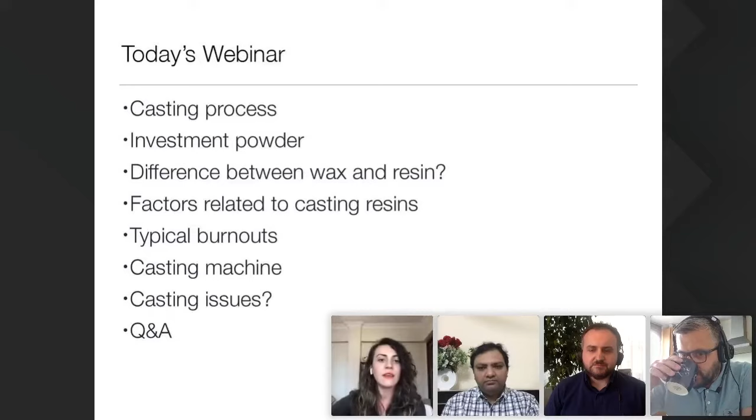Okay, perfect. Thank you very much for joining us, and thank you for everybody to listen to us. It's a very hot topic, I think, casting. I have been in the jewelry industry for the last couple of years, and I think that this is the most asked question topic where people have some issues about casting.

Particularly when you look at what happened in the last 10 years or so, there are a lot of resins, different types of resins, and 3D printing has evolved. So today's topic is about casting, but specifically casting for resin.

We will be speaking about the general casting process, the investment powders, what is the difference between wax and resin. So I'll go through the presentation, and then, Tulay, you will collect some questions, and Dipen and Dave, you can comment, and then at the end we will have a good chat together.

We will speak about typical burnouts, what type of casting machines, and the casting issues.

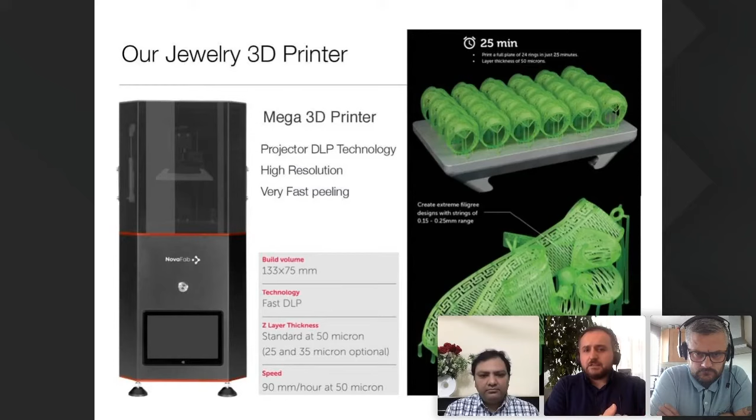We manufacture 3D printers. This is our latest DLP printer, which is very, very fast. And we also manufacture different sorts of castable resins that are suitable for a lot of different 3D printers.

In the previous webinar, we spoke about the different types of resins that we have, and whether you can use them for LCD printers, for DLP printers, for SLA printers. But we have pretty much a good range of castable resin, and our specialty is really castable resin. So this is the topic.

What is important about the resin is that you want to get basically the same casting like wax. You want to be able to print properly, and then in our case, we don't need any post-curing. And then you want to cast it in a simple way so that you will get the best result. So that's my introduction about our resin and the 3D printers.

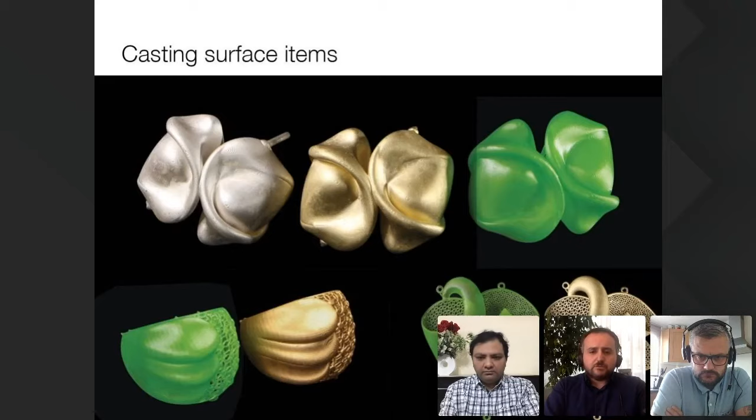In the previous slides, as I mentioned, we have some surface jewelry. You can also do stone settings and cast directly with stones. We have customers doing it in India, Turkey, and also in Dubai.

So the main topic is let's start to speak about the casting and how we work. One thing is the chemistry of the resin, which I am an expert in. Dipen and Dave, you are very well versed in the chemistry of investment. So I'll go through the slides, and then please comment, and we will speak together.

I just want to briefly mention that investment powder - some customers or people think you just mix it with water and that's it, like a powder, like plaster, and so on. But actually there is a very specific chemistry going on there. Here I just put a few slides showing that when you add water to this investment powder, the investment powder has a transformation happening.

Yeah, exactly what is written there. Basically, inside the investment powder - when you look at most used investment powders in the jewelry industry, it's made of silica, which has cristobalite and quartz in it, and it also has gypsum. Gypsum is the binder that is used to put it together. In the dental industry they use phosphate-based investments as a binder, but in the jewelry industry they use gypsum.

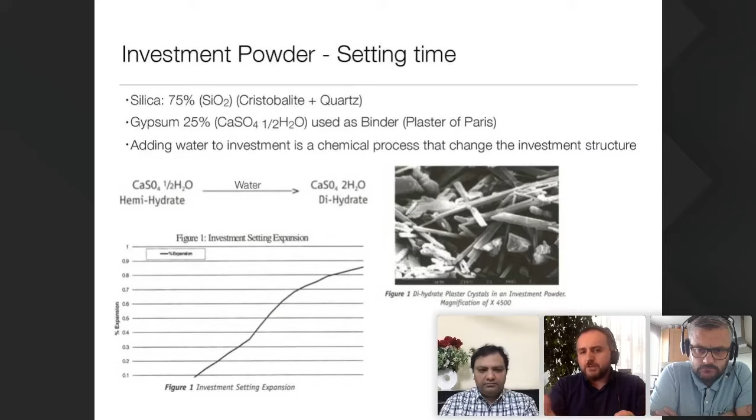That's very important, because when you add water to the powder, you need to think of it like a chemical process. And when you speak about a chemical process, you need to consider timing - how you mix it. If you mix it too much it may happen differently, if you mix it too little, if you put too much water or too little water. Here we have some instructions from one of your latest products, I think, Dave.

Excuse me, I have one question - how about distilled water? No, not distilled water, it's very different than deionized. Deionized, you're taking the ions out. Distilled, you're taking minerals out.

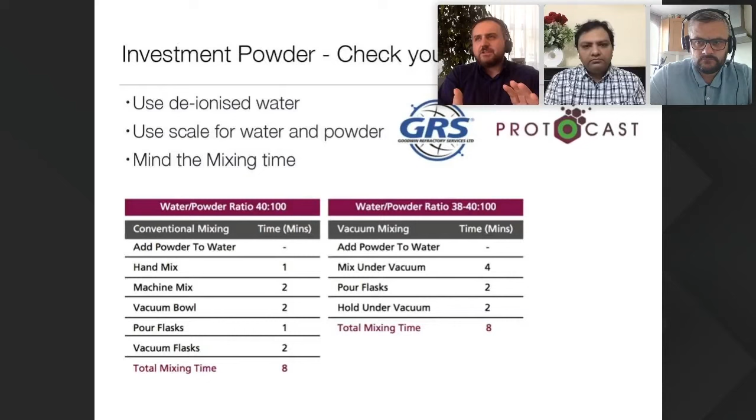It changes things - so we don't want any ions in the water, that's the first thing, you need to take out the ions. The other thing I want to say is when you do the mixing, let's say 40:100 or 38:100 or whatsoever, there's an important question of whether to use a scale or measure volumetrically. From my knowledge, scale is the right thing to do - scale is always number one. Always, if possible use a digital scale, it's more precise. In one factory I visited maybe 2 years ago, I think what happened is they were using a scale, but the scale wasn't calibrated - in other words, if you put 1 kilogram, it didn't weigh 1 kilogram.

Because in large factories when you use the same equipment nonstop, sometimes you need to zero your scales and make sure that you don't have this important difference. Even if they are using digital scales, have them calibrated.

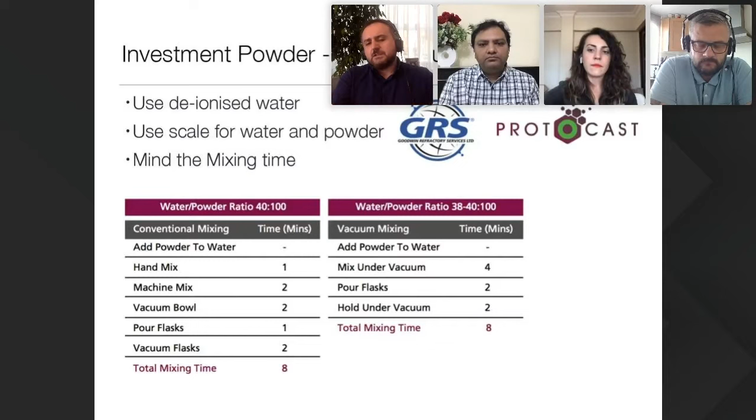What is very important, I think, is to mind the mixing time. Whether you mix with a vacuum mixer or conventional mixing, these minutes are not just there to give an idea. Because if you mix, let's say 2-3 minutes more or less, the chemistry will be different, so the whole process will be changed.

Last questions about mixing powders. Should I change the water powder ratios according to the humidity and the weather? No.

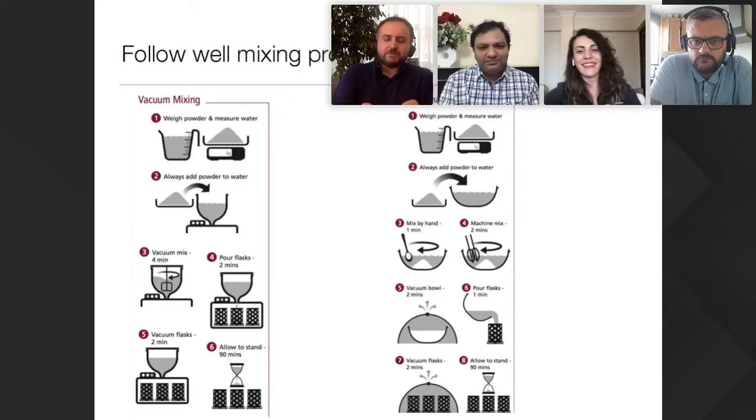We will maybe answer it later on, because there is actually the humidity — to remove the humidity we have a process as well. So whether you are in a very humid country or less humid environment, you may use that process to make sure the humidity is addressed.

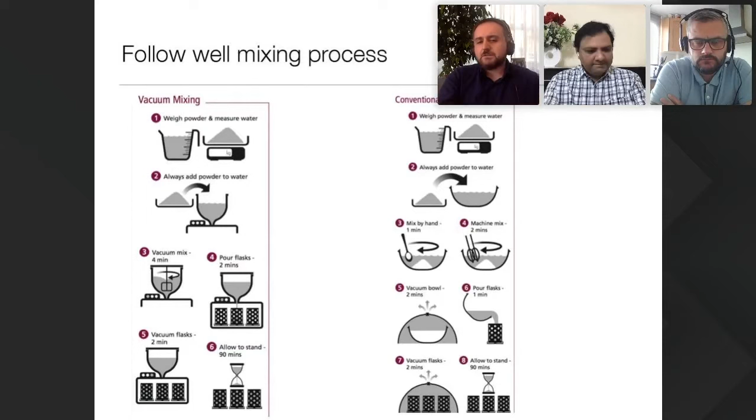Here is the process, but you can find it online on your company website, and there are all the instructions for every powder, the mixing times, the way it should be mixed, and I think it's pretty straightforward.

Okay, explained everything now. One thing we discussed earlier is we mix and settle down the flask, and during that settling, basically mixing and settling, the gypsum is expanding. But then what happens when you heat it? You wait, let's say 2-3 hours on the ground, and then you put the flask in the oven. There are actually different expansion and shrinkage areas.

That is, I think, very important and very interesting. First of all, the first phase between, let's say, 45-50 degrees up to 250 degrees — these are all in Celsius, so if there are some US attendees, they can convert it to Fahrenheit. But basically, you have this first stage where the gypsum is expanding.

After, you have a high expansion side, let's say from 250 up to 300 degrees, where the cristobalite element as well is expanding. So you have the gypsum that was expanding, but now there is a very huge force of expansion due to the cristobalite component inside the gypsum, which after a while the gypsum is now shrinking — it's a reverse effect.

And because the cristobalite expansion has ended, the expansion is going down. Then at around 450, 460 degrees, the quartz element starts expanding. I highlighted here a yellow area, which is basically the area which is not expanding — around 370 to 450 Celsius. That is a safe zone, because you know that at that area, your flask or investment will not be expanding or shrinking.

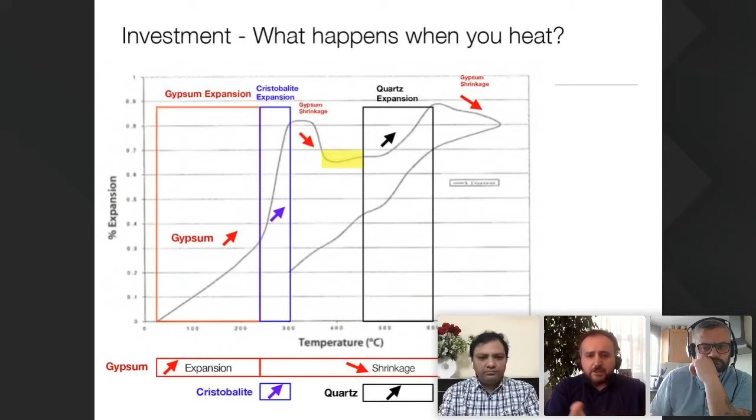Any comments on that, Dave or Dipen? No, you've explained it perfectly. That is exactly what's happening inside the flask — that's how it gets its fired strength.

So when we put it in the oven, what we should think is, depending on what happens to the heat and the forces, that this investment in the flask is expanding and shrinking non-stop.

You have these movements basically happening. The way that the investment powder gains its strength is when it expands more than the metal flask that it's in. That's where it gets compression and the strength. So it expands more than the flask, and then when it cools down, it stays expanded higher than what the metal flask is. Typically, this range is less than 1% in most investment, but I think it changes depending on the quartz, cristobalite and gypsum ratios, right? Because not all investment has the same amounts in it.

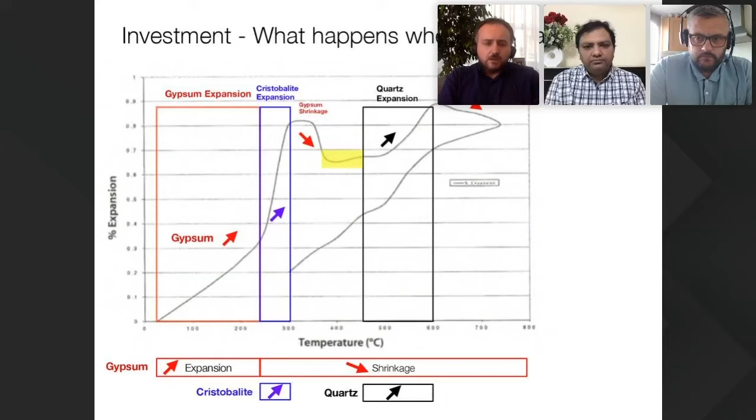Now we continue. I want to get into what is happening when you do resin casting, because for wax casting, when you go to 80 degrees or so, things start melting. Then you have the carbon that is burning after a while. And in some cases there is the dewaxing process that was traditionally made for the wax type of casting. But when you speak about resin, this is a totally different game. There's a very interesting paper, and I will give all those references at the end, or you can ask us and we can send you those papers, which is online.

What they did is they compared what happens between some resins - these are not our own resins, but some other resins - and wax. So here on the left-hand side, you have milled wax. On the top, the red one is the injection wax. All the others are resin. And on the bottom, you can see one known resin, they also call it wax but it's not wax, the ProJet from 3D Systems.

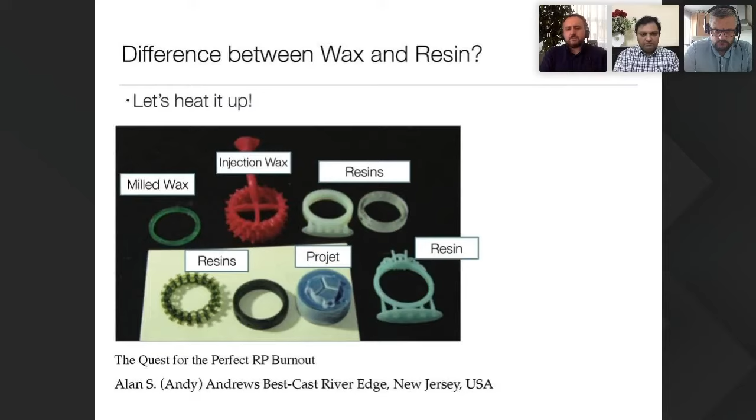So they took all those samples and fired them up, basically heated them up. Now, what happens is when you are at 100 degrees, on the top side you can see that already the injection wax has melted, okay? It didn't disappear, it didn't fly off, but it has melted. But the whole resin parts are still there. The milled wax seems to be stronger as well, so it's still there. On the bottom, when you go to 177 degrees, let's say 350 Fahrenheit, there is no more wax that is not melted. So the milled wax and injection wax are all melted, but you can still see whole pieces of resin that remain there.

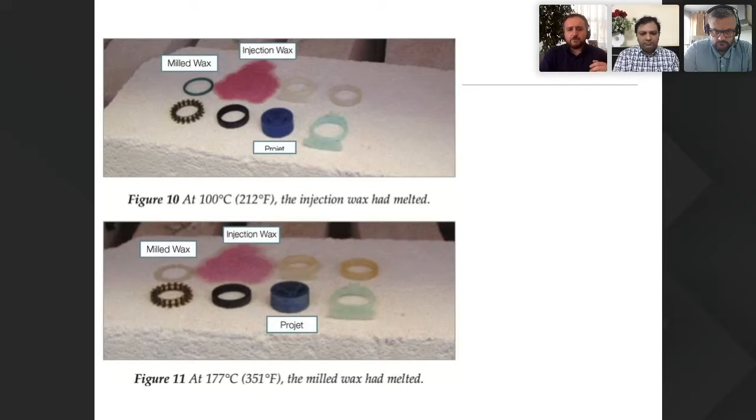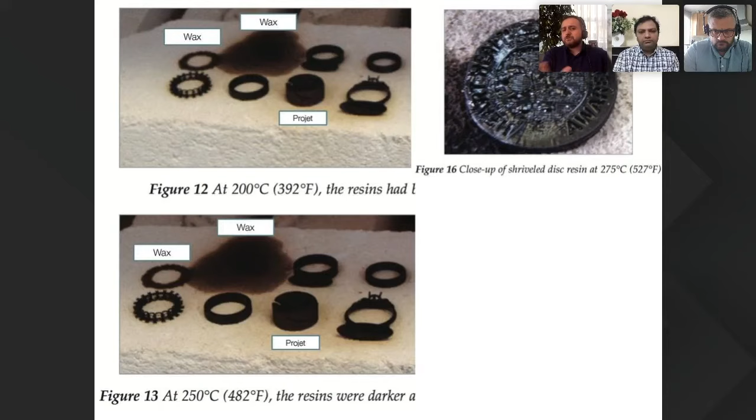Let's increase the heat a bit more. At 200 degrees, we don't see anything about wax. There is still a black spot there, but the resins and the ProJet part - what you can see is they become dark, and it's a sort of carbonification. So you can see that something has happened at 200 to 250 degrees. And if you look at some pieces at 275 degrees in those resins, you already see that there are some deformations that happen in the resin. This can be due to expansion or change in the shape of the resin.

Now let's continue. We are now at 375 degrees. As you can see, no sign of wax, but still these resins are there. And we push up to 700 degrees, which is quite high temperature, and you can see that those resins have ash remaining - some of them may have more ash, some of them may have less ash, okay?

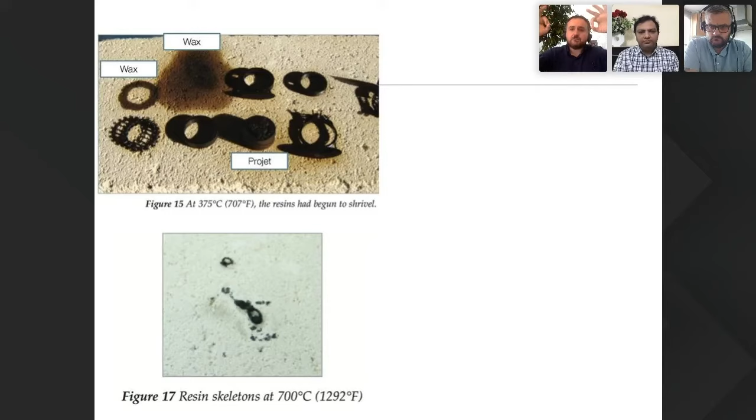So what happened here is that when you compare casting between wax and resin, never think of the temperature and say, well, wax is melting at around 80 degrees, it's already melted. So if you have the tree of your investment, this is already melted. If you have your rings on your tree, these are already melted, then they are at the bottom, waiting, let's say. And when you increase to 200-300 degrees and even more, the wax is going to fly off, okay? But for the resin, if you have a tree with the middle which is wax, the middle is melting, but your rings are still in the cylinder - they are still not melted, they are still staying there. So I think that's very interesting to think about.

And when we look at the most common issues with most resins on the market, what we can see is, first of all, you have a high content of ash. So even if you burn it at 700 or 800 or 900 degrees, you still have this ash component that stays in the resin. That's not the only problem, by the way. The other issue that most resins have is that during the burnout, when the temperature is going high, the resin is reacting with the investment wall.

So you have some reaction happening, and also the resin is expanding, so you have some movements happening. And this is a very important point to consider. When you cast a resin, you need to know how much it expands, what type of reactions it has with the investment, the content of ash, and so on.

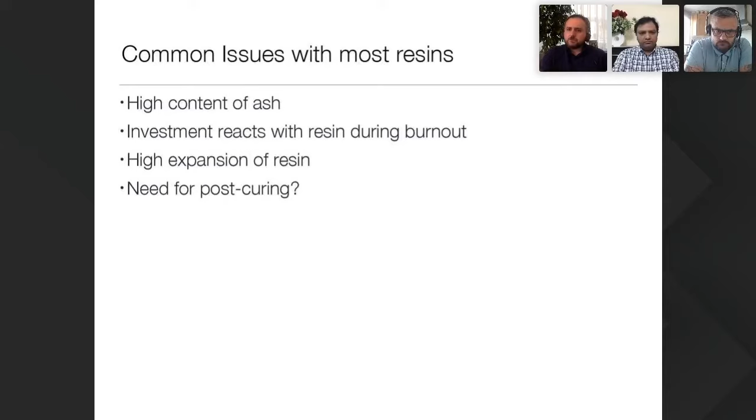Just a note about the resin, I've seen in a lot of forums and users, they do post-curing of the resin to improve the casting. This is not something you have to do with PowerCast resin, with our resin. We don't do any post-curing. But I want to introduce another paper that shows the result of post-curing. Any comments on that, Dave or Dipen? You're fine? Yes, it's okay, perfectly okay.

I don't want to, because we have a lot of slides and quite heavy content, so let's go fast here. What happens if you post-cure some resins? This is another paper which is very interesting, and we can share it as well. They took a very known resin in the market and did casting tests by post-curing 30 minutes, 1 hour, 2 hours, and they also did some heat curing. So they don't just post-cure, but they also leave it in the heat before making the tree. There are different tests, they heat cure and so on.

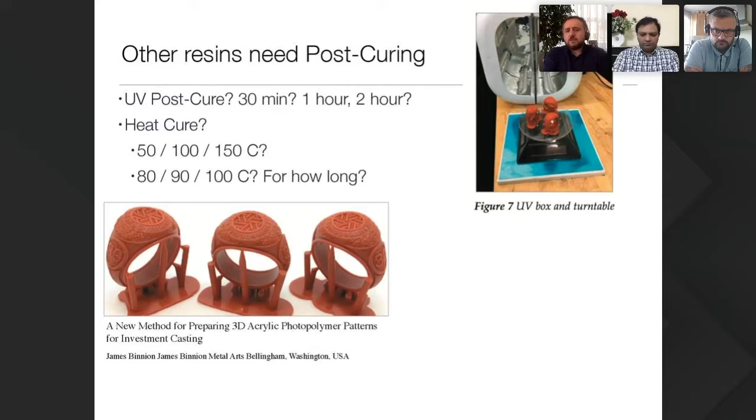I repeat, you don't need to do this for our resin. This is just a paper for other resins that has been made, and let's see what the results are. For that particular resin, if they UV cured, you have the casting result on top. And if you have the heat cure, you have the casting on the bottom. There is a slight improvement, but according to me, or everybody I guess, this is not really satisfactory.

What I'm trying to say is that if you post-cure or heat cure one resin, you may have improvements that change the chemistry of that printed part, which may affect the reaction between the resin part and the investment in the burnout. But this may not be satisfactory, and the result may not be good enough, because your starting point is not really a good castable resin, or not the right appropriate castable resin.

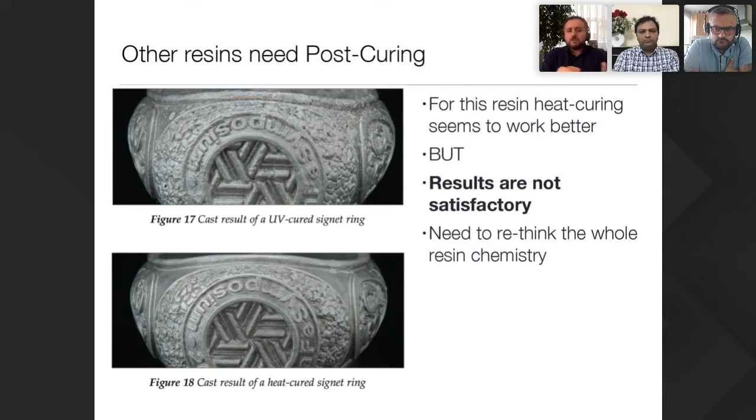I think one of the things we did 4 years ago in our R&D department is rethink the whole resin chemistry. We changed the whole thinking of how we should make a resin for 3D printers, considering the whole process of the burnout and the investment used. When you start looking at the chemistry, you have to change the basics. That's why you don't need post-curing in our case.

So let's see what happens if you use one of our castable resins. You have almost no content of ash. In some of them you have a little bit, but not so much. And that little bit, let's say 0.5, 0.3%, or very little amount, is already removed during the burnout, because there is a sublimation process, meaning the pressure, when it goes from solid to gas, removes that ash from the investment. You don't have any reaction with the investment.

You have a very low expansion, and one important thing when you print is you don't need any post-curing. Our resins are able to disintegrate quite early in time, and after 500 Celsius there is nothing that remains. I have some customers who try to go up to 800 Celsius or more, thinking that if they go to 800, 820 Celsius during the process, they will remove the whole resin. But actually you don't need that, at least with our resin, because after 500 degrees, everything is finished for the resin side.

Right? Dipen, you have a lot of customers in Dubai using our resin. Yes, it's a blessing for us, believe me, when they are using your resin. We have a lot of issues solved at the preliminary levels.

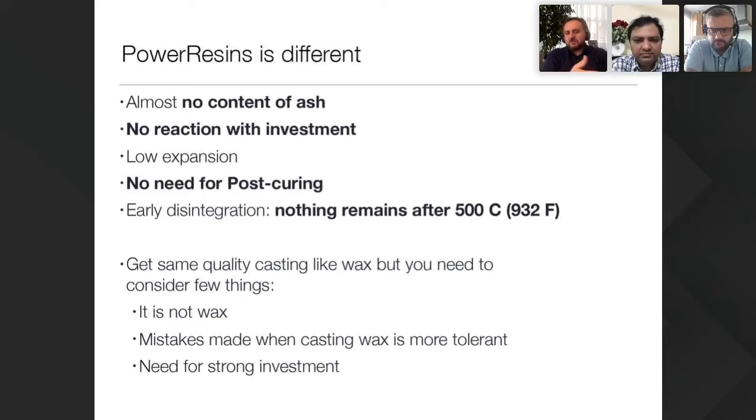It's not advisable, because you're firing cold air into a hot flask - you can get the mold to crack. I think they do this to try to remove the ash remaining from those resin parts. The problem is, if you burn out a resin part at 800 degrees, the ash reacts with the investment during burnout and stays on the wall of the investment. So the air you put inside won't remove that ash so easily. I don't think it's advisable. It's better to start with a low ash content or no ash content resin at the beginning.

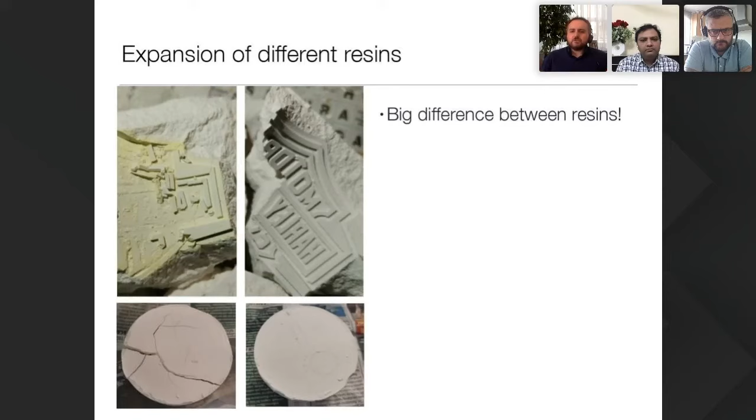By the way, here's a slide I have which is interesting. We took another resin and one of our castable resins, printed a big part, and put it in the investment. We did our burnout cycle, and due to the expansion phenomenon in the investment with that other resin, you can see the whole part on the left - all the details - the investment has cracked and broken. On the right side, you have a clean burnout. That's the difference between a good resin and another resin. There are a lot of resins on the market that say they're castable, but according to what? I really don't know when you look at the details.

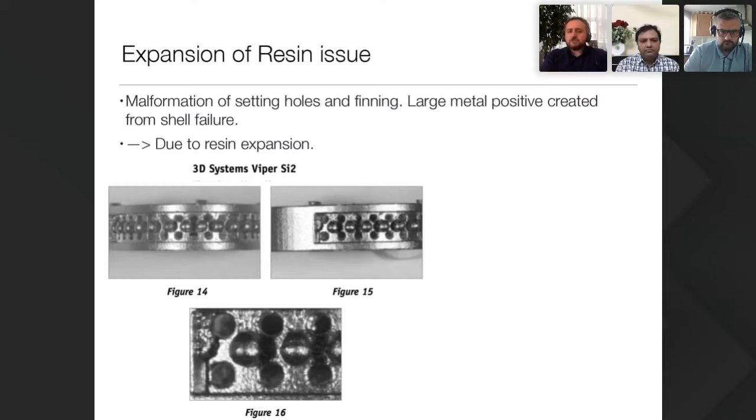Okay, now we're going to the hot topics, I think. Any comments until now? No, it's okay, it's good.

I receive, maybe every week, different questions from customers about what burnout to use. We've put official guidance on our website, PowerResins.com, and our team gives a lot of advice to customers. First, people think everything is about burnout. Burnout is important for the investment, definitely very important. It's also important if you know what's happening in your resin, so you can adjust your burnout accordingly. It's also important for the strength of your investment, which matters for your casting. So I want to speak a bit about the logic of choosing a burnout - what to look for.

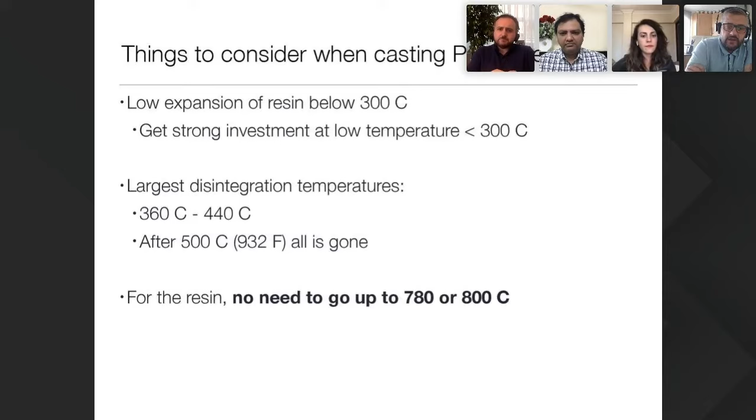Dave, you want to say something about it? You recommend, I think, 90 to 120 minutes or more? We recommend a minimum of 90 minutes. After investing, it's left undisturbed for 90 minutes.

You're on the same ground, I guess. Yes, I think there is no shortcut on that. People try to make it short, invest and then put it immediately into the burnout furnace. It's a very big mistake that they do. I think there are a couple of papers where 2 hours is a good time, but 3 is slightly even better. But 90 minutes is definitely the minimum. If you don't leave it 1.5 hours, you can have really serious issues with the strength.

Yeah, for sure. The investment powder isn't gaining its green strength in time. It isn't expanding. There's no compression. 90 minutes minimum.

Now, I have these slides for our customers when they cast power resins, about what they need to think about. There is a low expansion of the resin. We want an investment that is strong, but on the resin side, we want it to be strong below, let's say, 300 degrees. It doesn't really matter if it's strong at 700 degrees because there is no more resin in it anymore. So you want it strong when the resin is burning out.

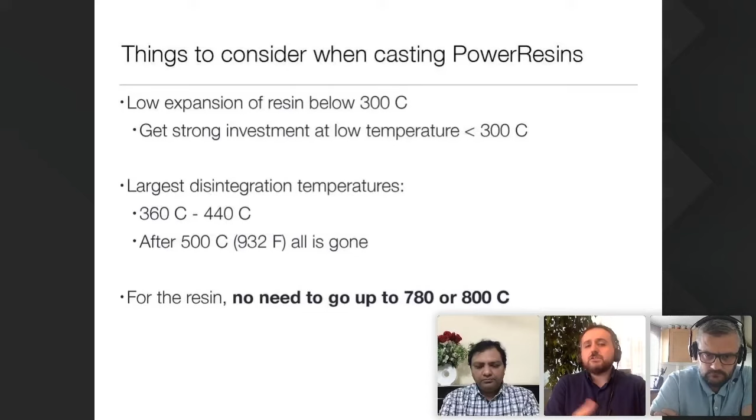We know that the largest disintegration period is around 360 to 440 degrees, but it already starts before that. So what's important is to have strength at the low temperature, and after 500 all is gone. So we don't need to heat the oven up to 780 or 800 degrees.

No, in our case. But for the investment powder, you have to go to 730 to get the expansion and get the full strength. Yeah, 730 is good, pretty standard as well. You're right, Dave. In those slides, I put 750 to make it simple. But is there any issue about the difference between 750 and 730? When it's that high a temperature, 20 degrees is not a big issue.

Okay, so we want to have a strong investment. How do we do that? First, you mix your investment and leave it at least, in my opinion, 2 hours, but minimum 90 minutes, ideally between 2 to 3 hours on the ground. You don't put it in the oven because it needs to lose its humidity to form and have all the expansion happening.

You wait 3 hours. There is a very interesting paper where they tested different burnouts, and one of them had a step at 100 degrees. At 100 degrees Celsius, the water is not boiling yet inside the investment. If you put it in an oven at 100 degrees, because the middle is much less in terms of temperature, it will not boil, but it will remove the humidity. In that paper, they put the investment in at 100 degrees for 2 hours, 3 hours, making a step like that.

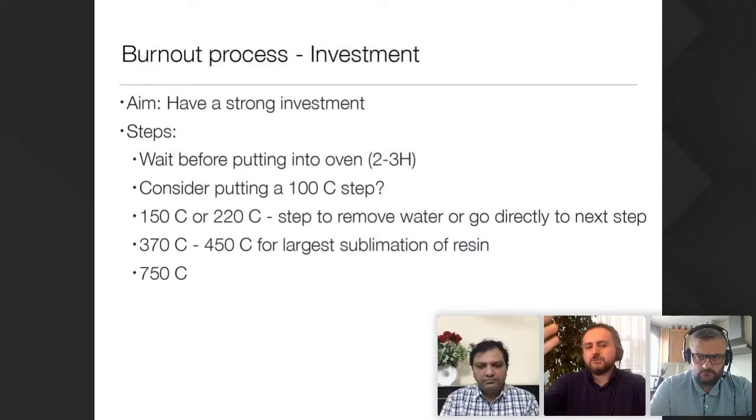Yes, exactly. When it condenses, you're creating steam, which creates pressure. Then remember there's this safe zone between 370 and 450 degrees, where the investment is not expanding. That's also good because this is where most of the resin is disappearing. So you can use that safe zone as a step and leave the investment there, then go to 730 or 750 and finish your casting.

So even if you go to 500 degrees or 270 degrees or whatever temperature you program your oven, inside your flask you have water. That water boils at 100 degrees. While it's boiling, until the whole water has been removed, the temperature inside the flask cannot go above, let's say, 120 degrees - it's very difficult. So there's this lag between what you think will happen to your burnout and what really happens, because of the boiling of the water you stay at around 100 degrees Celsius. Once the water is gone, then you increase.

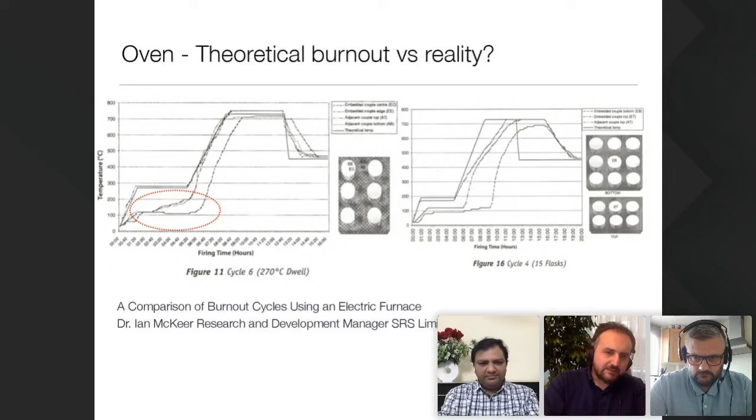So this is just a note about what is really happening versus what you think is happening, let's say. So here I put just a recommended burnout, but again, please take all those burnouts according to your investment powder.

So the first thing I always say is, at least with our resin, because we know it's very easy to cast, first follow properly the whole steps of the investment recommendation. This is the first step I recommend. Check the mixing time, the temperature, the burnout that the manufacturer of the investment is providing you. This is the first step, and at least it gives you a reference. So if you want to try different burnouts, at least you have the reference, the benchmark, saying this is what happens versus what the manufacturer is telling you. And trust me, if you follow what the manufacturer tells you and have proper investment, 90 to 99% of the cases you will have very good casting, at least with our resin.

Dipen, maybe you have a word on your experience in the Dubai area and in India. Yeah, sure. I think manufacturers put a lot of effort to define those processes, the temperature and other things. It's not just that they put numbers - they have done a lot of practice, a lot of tests, and then they put this number. So please follow the numbers they are suggesting, that gives the best results.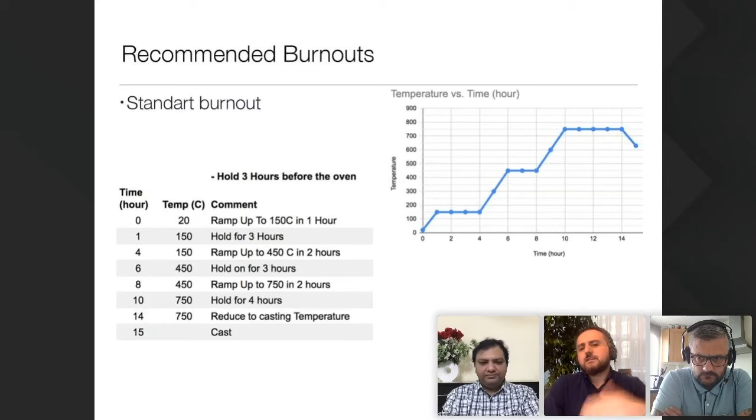We can speak about casting temperature, but casting temperature also depends on the type of the model, on your metal, on a lot of things. We will see some issues in a few slides where we can speak about casting temperature as well. And you want to do that last stage for at least 1 hour so that the inside of your flask gets to that temperature.

I have here another recommendation - I think some of your customers may use this as well. We leave it 3 hours outside, we put it in the oven, but we don't go to 150 degrees or 200 degrees. We leave it at 100 degrees for 3 hours. We do that because we want to remove the whole humidity.

We know that if we do that, the strength of the investment will be stronger than if I don't do it. Do you have a lot of customers doing that? Because this is not very common. Even the people doing overnight burnout, putting the flask in the oven, want to make sure they use the whole time - they keep it at a certain temperature, like 80 to 100 degrees for 3 hours, then slowly move up to make sure the moisture is completely dried, nothing remains. So a lot of people are doing this. The people doing day casting are always in a hurry, so it's a different scenario.

Yeah, that's correct. Then you can go to a step where you hold at, say, 150, in this case it could be 200 or whatever, because you already have an investment with very little humidity, so it will be easier to ramp up and the remaining water will be removed. Then you have your 370 to 450 zone, which is fine. And then you go to 750 or 730 - by the way, I've seen a comment that when you use stones or diamonds, the last stage, the highest temperature, may be slightly lower, right? I don't know if you have...

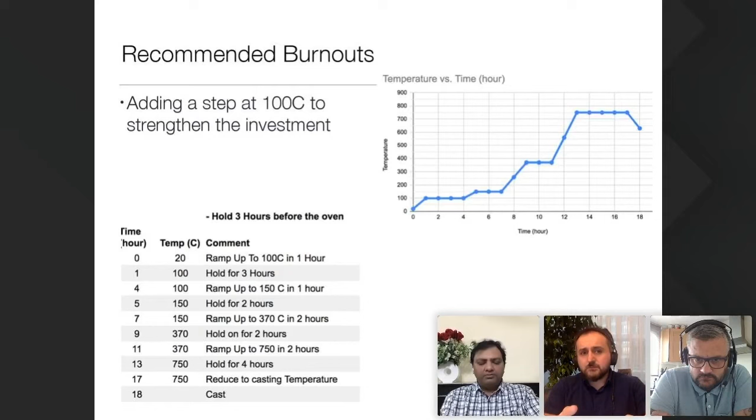Okay, very good, let's continue. So now, just to compare, this was our slide. We have a lot of steps here, and it's quite a long burnout - here we see like 17, 18 hours of burnout.

What happens if you remove the step of 150 degrees? Remember what we showed before, where even though I go very high, to 450, inside the flask it still remains at 120, 100 degrees because the water is evaporating, and then it will go up. So it can be done - I would say it is a possibility, but it's experimental.

What is your comment on that, Dave? It's experimental because removing that step between 150 and 220 is a critical step for the investment powder. Yeah, but that's not to say it doesn't work - we've seen it working in other places. I've been with Dipen where we've seen it working in places. It may depend - this cannot maybe be a recommendation for all investments, but in some cases I think I've seen it working as well, and even different. We'll see in the next slide. Directly ramping up works as well, in some cases.

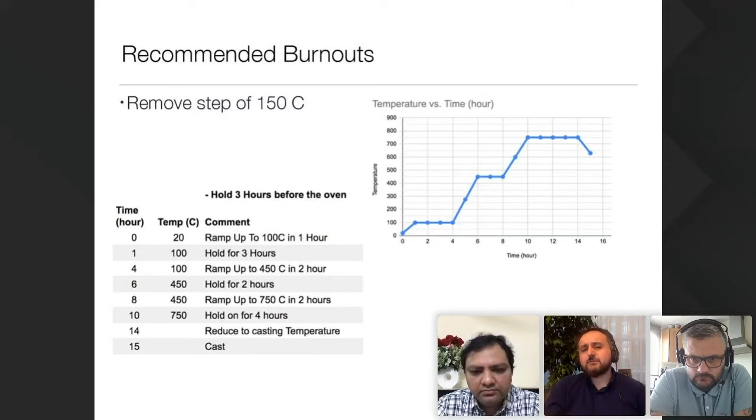From the resin perspective, there's no issue doing that. You can do it because the temperature, from 100 to 450 degrees, at least for our resin, has low expansion, so there's no major issue. For other resins, you may have issues doing that, I think. But as long as you stay - once you arrive at 500 degrees, everything is gone. So whether you do it fast or do a lot of steps, the 150 degree step doesn't change anything for the resin. That's what I meant. But the 100 degree step is interesting to make the investment stronger - that's important for the resin.

So, okay, you can even make it shorter, or directly heat up your oven to 750 or 800 degrees and just put your flask in. I have seen this done, I have seen that type of burnout. Again, these are experimental, and sometimes it works very well, sometimes you have other issues.

Hi, Tülay, some questions? Hi again. Yeah, we are almost coming to the shorter cycle - I got some questions about short cycles, but we are getting there.

Before that, how long should I leave the flask at casting temperature before I cast, because some say the inside of the flask is hotter than the outside? Minimum 1 hour - no, in the furnaces you have to keep it for 1 hour.

Immediately when you take it out from the furnace, you can go directly for the casting because you're sure that the flask is at the right temperature when the burnout is showing good or the precise temperature. One thing about the investment powder is it also holds heat very well on the inside. So one of the tests we do when we create a new recipe is we take a flask out of the furnace with a filigree item in it, and leave it for different times, 5, 10, 15 minutes before it goes into the casting machine. There's not a great deal of difference in the casting because the investment powder holds heat very well.

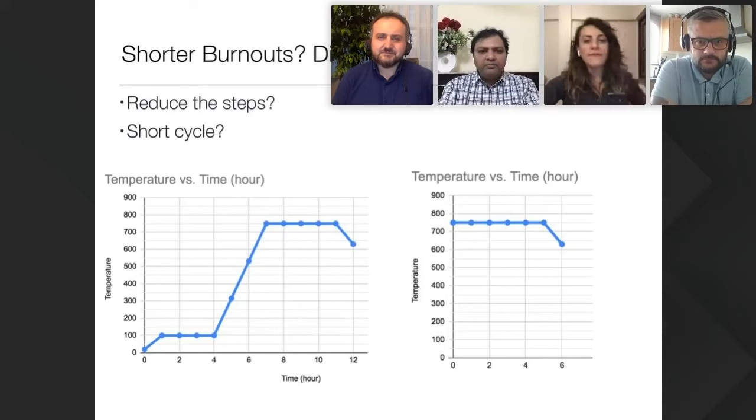Last question: should wax and resin be in the same flask or not? Yes, you could in theory, but it depends. Go ahead, guys, your comments. Okay, you go first, Dipen. Okay, I'll go. Because of wax and resin, people put them together since some resins require very high temperature to burn out - they go even maybe 730, 750 degrees, not our resins I'm talking about, but some others. So because they want to completely remove that ash, they put them both together and then do the wax burnout first.

So that is finished, which is the very low temperature also. Then they go much higher, up to the resin burnout temperature, let's say 750, 780 or more. And then they come back again to the casting temperature.

I have seen this with many customers doing it because the resins are not good enough to burn out completely to ashes. They want to make sure they go higher and then finish it up. So they put both out together, but then they have to play with the casting cycles, both together. They can, but we recommend it's better to keep both separate.

Yeah, exactly what Dipen says. I've visited many customers that have waxes and resins, different types of resins, all on one tree. There are many customers that don't print themselves - they are just a casting shop where the prints are sent to them.

Very similar to how it's set up in Turkey. Most of the companies in Turkey, they don't print, they don't wax inject. They have everything sent to them. They will put everything on one tree and cast.

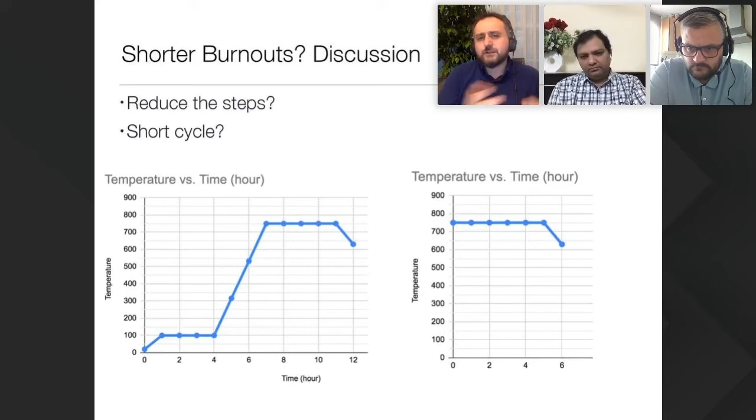Yeah, I agree with that. I mean, you can mix pretty much most of the wax with resin. The only thing I've seen is if you have a very large resin part that has big expansion, it may crack some walls of your investment in that area. But most of our parts are very light jewelry and light parts, so whether you use our resin or another, you can put it with wax. I think that's safe to say.

So, we will be speaking about some casting issues and solutions. Let's go through some slides, and then we can move on to the questions.

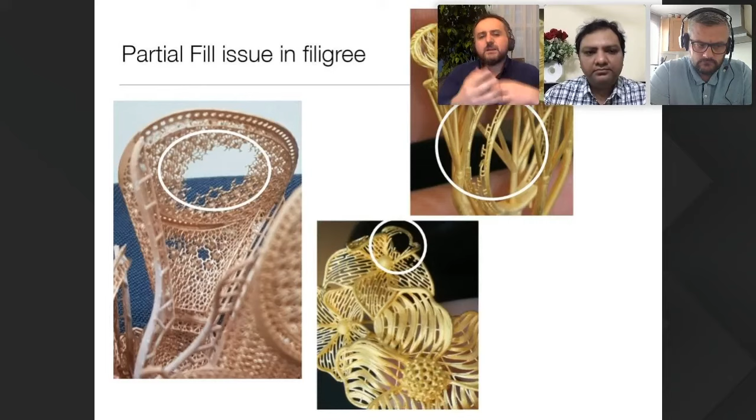One thing we see quite often in some areas, where by the way those manufacturers want very light jewelry, so they use very tiny filigrees, is what I call partially filled. So you have this bangle or this ring, and part of the metal didn't enter that area.

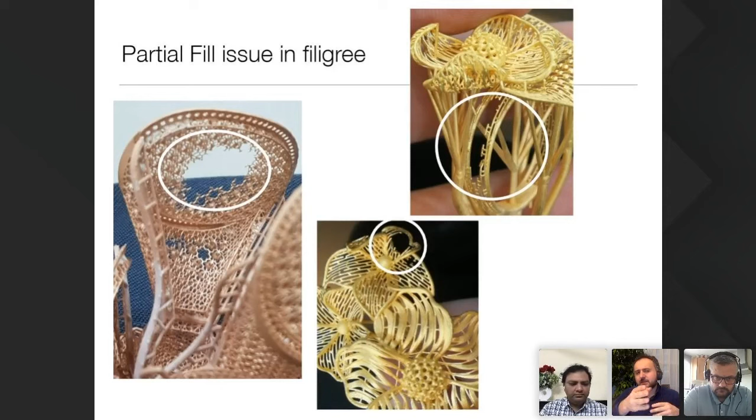This happens most of the time when you have very tiny strings. Like in that picture, the string is from one of our 3D printers, around 0.25 millimeters. On the left-hand side, I don't know exactly, but probably around 0.25 or 0.30 millimeter. So the metal didn't enter in those areas, and you get this partially filled result.

You can see that as well in very thin surfaces. Same here, the surface I think is around 0.26 or 0.27, and because you have a big part, the metal didn't enter.

Now, how do we overcome this problem? I want to keep it very basic - it's very simple in my opinion, but please comment after. So gold, the metal, or silver - when you melt it, it's basically a liquid, right? So if you increase the temperature, it will be more liquefied.

What you are trying to do is put metal that is very hot inside the flask that you think is hot - let's say 700 degrees or 600 degrees. But there is a big difference between the metal temperature and the flask temperature. It's like pouring something very hot onto a very cold surface. What happens? It solidifies. So when you put the metal into the flask, I think the most important thing is the difference in temperature between the flask and the metal.

If you have a very high temperature difference - in other words, if your flask is too cold, or your metal is too cold because it's solid - when you pour it in, solidification will start quite quickly, and the metal will not be liquid enough to go through those details. Depending on that. Any comments?

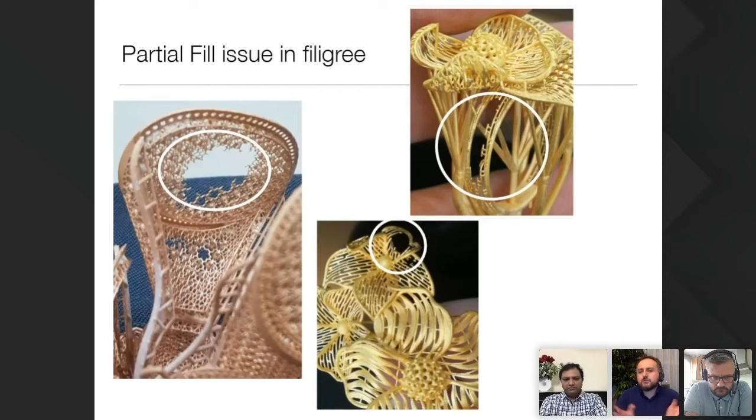And also the correct investment powder. Yes, with the correct investment powder, it will have the correct permeability to allow the alloy to flow in the flask.

There is an example we'll speak about later, but manufacturers should understand that the investment powder cooked in the burnout actually has, it's like a sponge - it has some permeability, not as much as a sponge, more like a stone with some permeability. So if the permeability is good in that investment, when you have this pressure difference, the vacuum effect will be more efficient than if you have a stone with no permeability.

Just want to - please go ahead if you have any comments. No, okay.

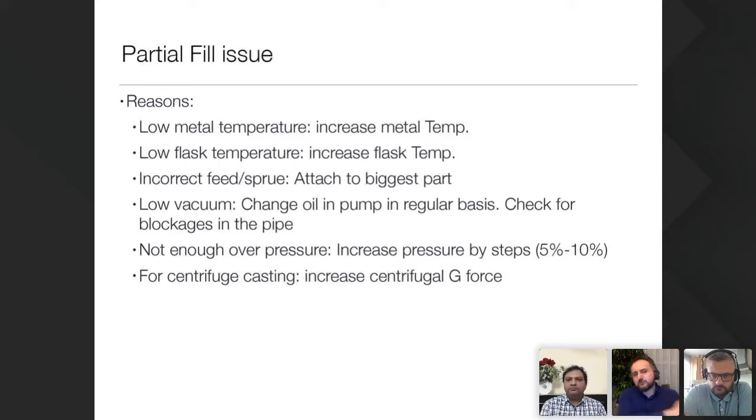One thing is, most of the largest manufacturers all use proper vacuum casting, but I know that in the US or even in some countries, and we did ourselves in our R&D, some use centrifuge casting. So if you have a centrifuge casting, you can increase your centrifugal force - turn it faster, get higher speed, higher pressure. For vacuum casting, you do that with your casting machine, and you need a proper casting machine.

Another suggestion I've seen in one of those papers, not very common in the market, is about the permeability of the investment. A way to increase that is to put more water - the ratio is 42 to 100, and by doing that they could increase the permeability of the investment by 30%. So it becomes more like a sponge, which means your vacuum would work better.

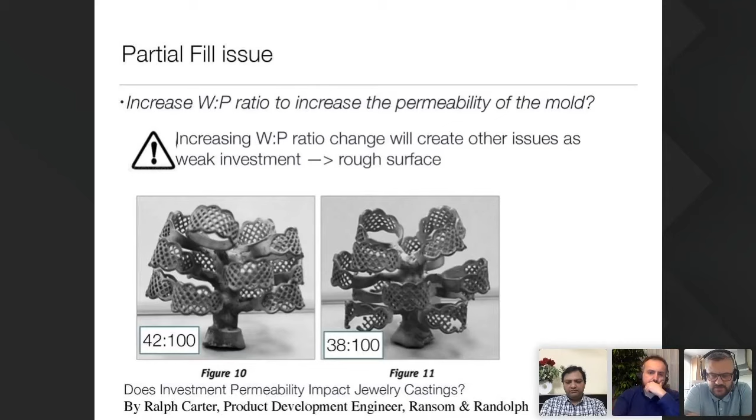But if you do that it may help, but be careful, because when you increase the water, as we'll see in the next slides, you will have issues with the surface. So playing with the water-powder ratio is risky. Any comments on that? Very risky - as you've said, weak investment, you'll end up with flashing, rough surface. The correct investment powder gives you the correct permeability to start with.

So first of all, if you put too much water, you will have rough casting surfaces, and also your investment will be weaker. Remember we said we want a strong investment, which is good for the resin, for the whole expansion part of it. So if you don't leave your flask enough on the ground, at least 2 hours before putting it in the oven, or if you don't use that step of 100 in the oven to remove this humidity, your investment will not be strong enough.

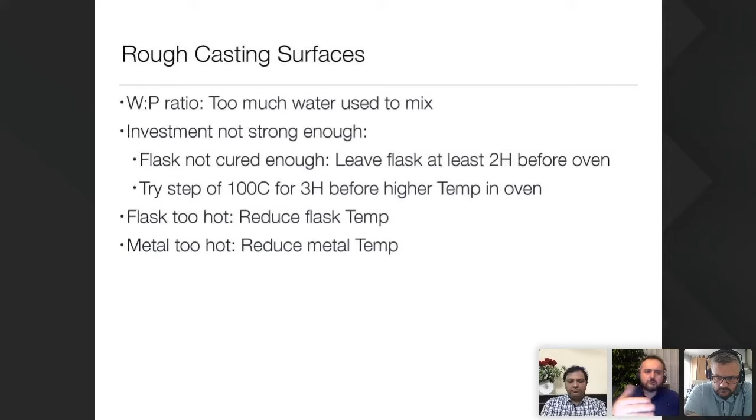So these are the issues seen on rough casting, but I'll give some examples. Let's say we play with the water - that's on the left-hand side, one paper which is also in the reference. It's interesting, they played with the water-powder ratio. It's a very standard investment - I don't think it would have this result with some more professional investment, but anyway it shows the result. On the left-hand side you have much lower water, on the right-hand side you have more water.

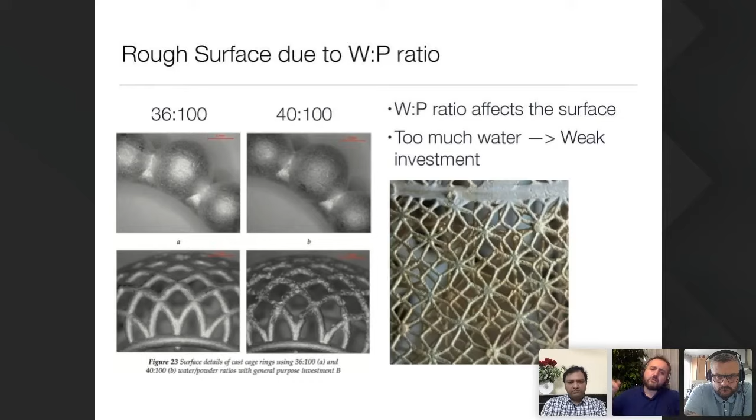What happens is that when the water is evaporating inside the flask, if more water is removed from the surface, this basically gives you a granular surface like that, and we can see it also on the right hand side. And because your investment is weaker, when the water is removed, it will basically remove some chips and flakes inside the investment. This is called spalling.

Also very common. You can see that in wax or in resin, and I think it's due to the pressure happening if you remove the water too fast, that those chips and flakes are entering the investment. The walls are contaminated from the pressure of the water boiling.

Dave or Dipen, any comments on that? Yes. No. It's okay. Perfect. If you heat up too fast, you're creating a pressure, and it has to release, and it will release on a flat surface.

And that released part of the investment remains in the flask, and when you pour the metal, that gives you this negative offset on the surface, which is something you don't want. And we hate that because it's very difficult then to polish and to fix it.

Which, by the way, this happens now. People tend to say this doesn't happen on wax, or it doesn't happen on that. But as I mentioned earlier, the process of resin and wax are different. So you need to consider the steps, and you need to consider the speed that's happening.

In our resin, we don't see a lot of those issues. If you follow properly the instructions, you will not see this happening. But go back, that issue does happen with wax also.

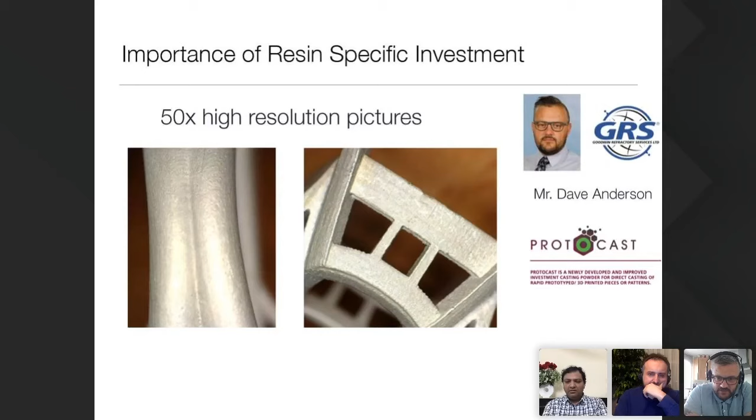Yeah, so Protocast, we launched it at the Vicenzaoro in January. We've tested this product in all of our factories around the world, we have 7 factories around the world. Before we launched it to the market, before we sent it out, I went to Turkey for testing this product. I've sent it to India, to Dubai, and we're getting good results back, good feedback.

These are your resin models that I took from you at the Dubai exhibition. Yeah, I remember, we invested in them. As you can see, 50 times zoom, very good for your stone settings, very good for your surface finish, because the pictures are very high resolution. Actually it's funny because you can see the layers on the prongs from the 3D printer, these are 50 micron layers, so we can also print at 25 micron. But just to give you an idea of the scale of that picture, you can really see the cleanness of that casting in black and white.

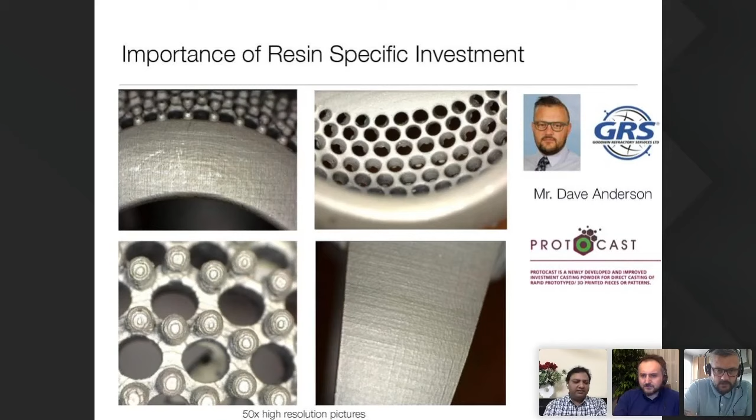You used a special camera to take these pictures, I think. Yeah, our digital microscope, yes. Okay, I think we can wrap up.

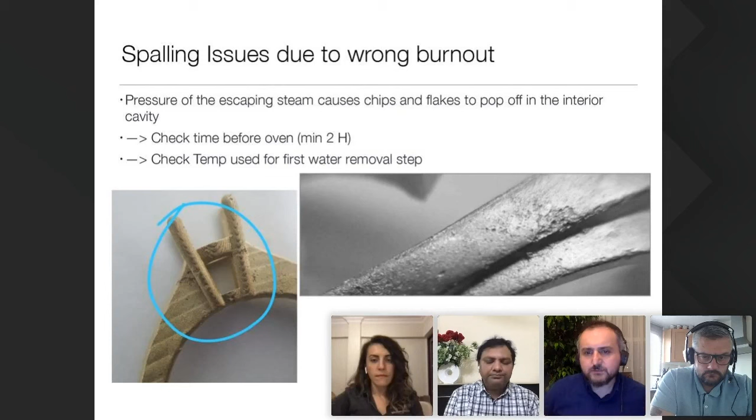Here it's the slide about the spalling issue. So if you have too much pressure escaping because you put either too much water, or you have this flask that goes into very high temperature, you will have these chips and flakes that pop off. And I think that was the rough surface - just to answer the other question.

Any comments or any other questions? I think we have a lot of questions. I see them - some of our team members are answering them as well. One question for Dave.

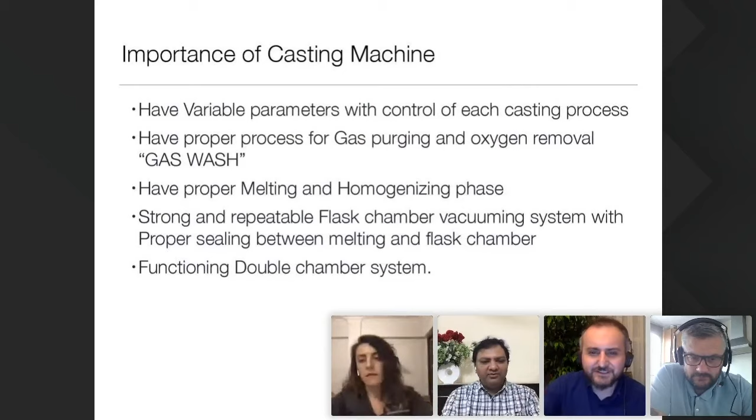Please tell me, is ResinCast the same as CADCast from SRS? ResinCast and CADCast are very much the same. Protocast is slightly different. What is the difference between Protocast and ResinCast? CADCast has been established in the market for many years, and there are many customers now using it, and using it well. Protocast was redesigned because resins have evolved.